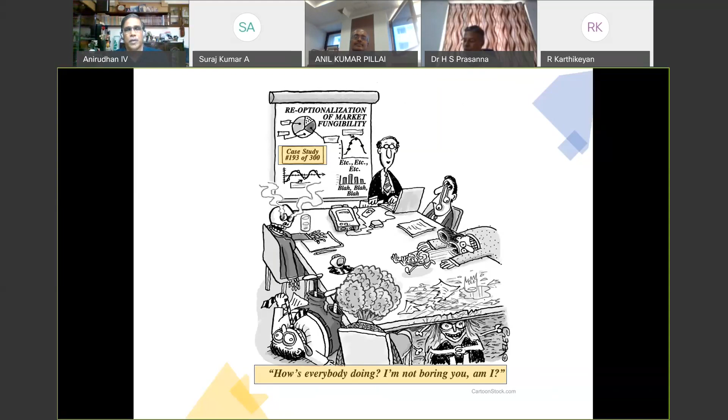So my attempt is to talk on the significance of case studies in geotechnical engineering practice. We all know that geotechnical engineering practice has come into existence because of a lot of case histories, a lot of failures, and after studying a lot of failures. So we have so many famous case histories all over the world, and some of the most celebrated case histories around the world are:

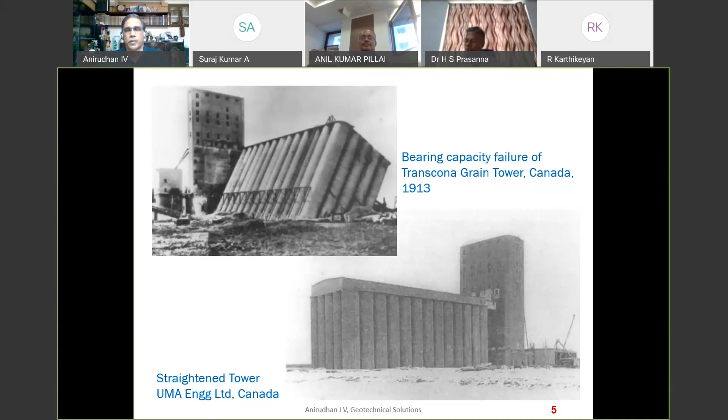there was a bearing capacity failure of the Transcona Grain Elevator, Canada in 1913, which was later straightened by the effort of several engineers and engineering minds. In Mexico, there are so many damages to different buildings, mainly because of groundwater lowering and construction of adjacent buildings, and also by the influence of heavy buildings on the adjacent light buildings. So the light buildings got damaged because of the interference from the heavy buildings. So there are a lot of cases like that in Mexico.

And all of you know the Pisa Tower, Italy case, which is a well-studied foundation issue, and there are numerous papers on the Pisa Tower foundation. And one of the celebrated case histories is a reticulated root pile technique that was used for earth retention construction of a tunnel in 1997. This is close to Manchester, where they used a series of micropiles interacting with each other to support a 14-meter high earth for the reconstruction of the tunnel.

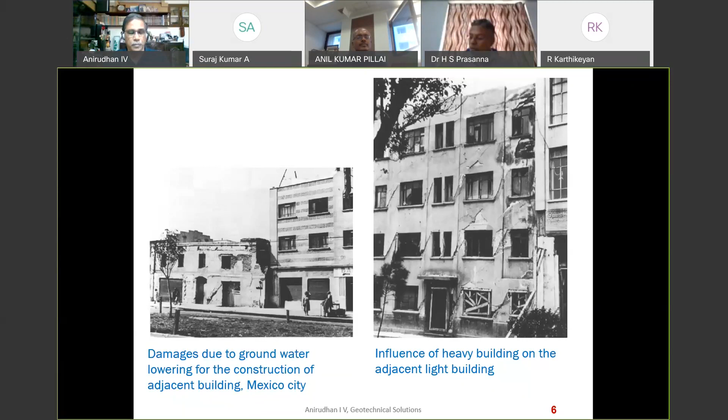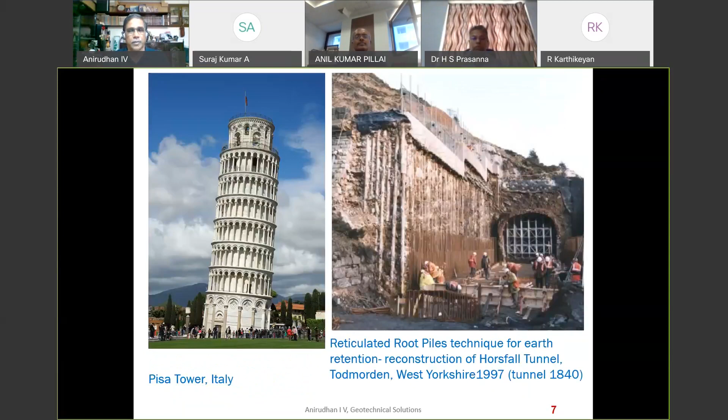And we have more recent cases like the Nicoll Highway collapse in 2007. Then we have Burj Khalifa Tower, which has no issues, but this is a good case of piled raft foundation where the actual settlements were much less than the expected settlements. We have the case of Millennium Tower in San Francisco, where there was an issue of building settlement. These are more recent ones, and many research papers are available on these structures.

When we come to the case histories from India, we are very much open to all the case histories, which is evident from conferences and workshops like this, as well as several sessions during the IGS Indian Geotechnical Conference every year. But there is a lack of well-documented case histories in India, because of which we do not know much of the research and advancements happening all over India. So my attempt is to present some of the case studies which I came across and see what contribution they make to engineering practice. All these case histories are reasonably well documented by me in some of the conference proceedings.

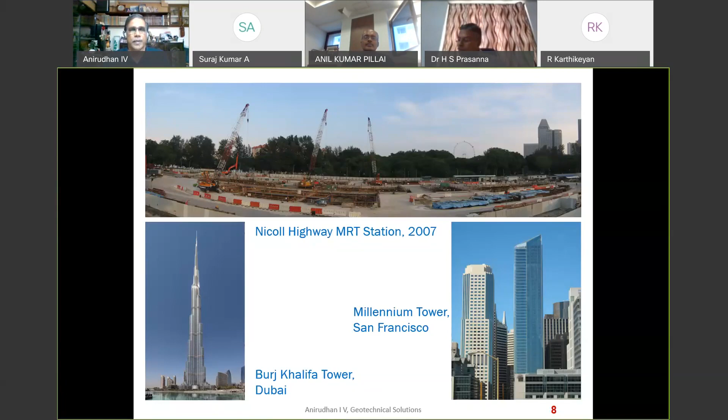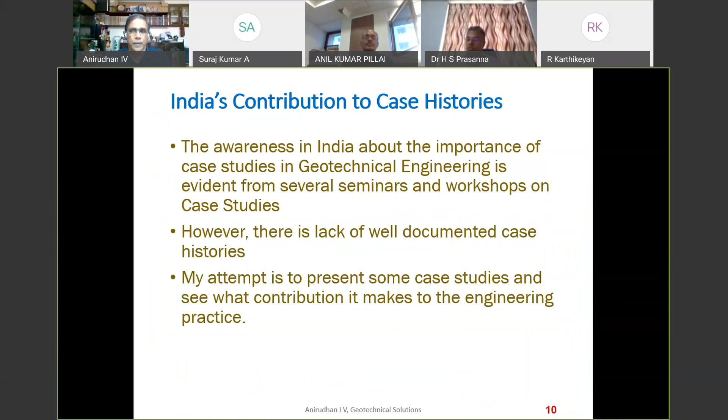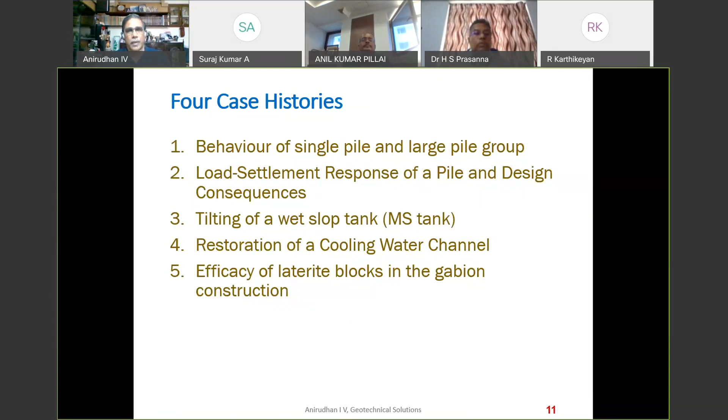I shall present 4 cases if time permits. One is the behavior of a single pile and behavior of a large pile group and how they relate, and the load settlement response of a pile and its design consequences. And there is a case of tilting of a tank in one of the refineries. And lastly, the restoration of a cooling water channel in NTPC Kaniha in Talcher. If time permits, I will briefly show some pictures of the efficacy of laterite blocks in gabion construction. So this will be the structure of my presentation. I will start with single pile and large pile group behavior, which will show why a detailed settlement analysis of a large pile group is necessary.

So I will take you to one of the largest fertilizer plants in Paradip, where we had several large storage tanks holding ammonia and acids, and some fuel oil tanks. Most of these tanks were supported on short piles, in large groups. The ammonia tanks were 33-meter diameter and phosphoric acid tanks 28-meter. And we had sulfuric acid tanks of 28-meter diameter and some fuel oil storage tanks with smaller diameter. These were constructed in the early 80s, and all these tanks are performing well now.

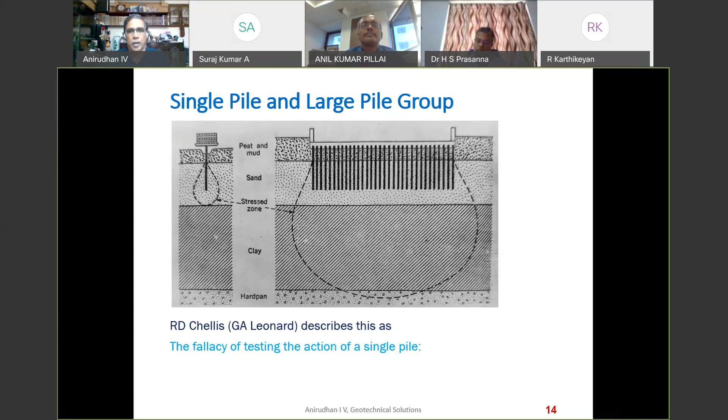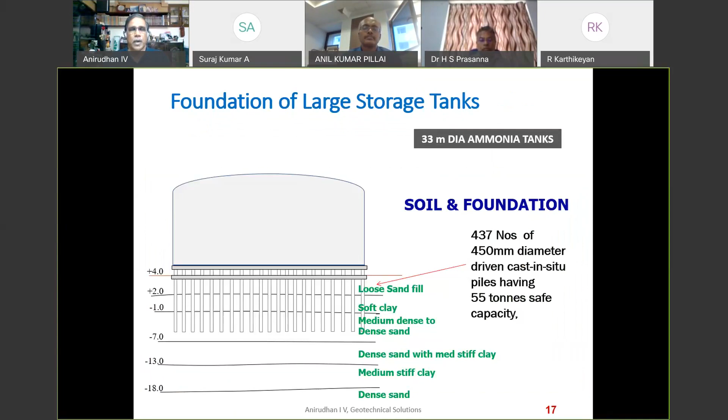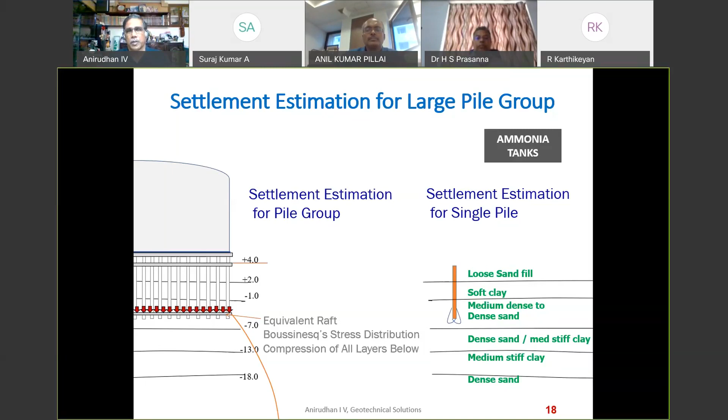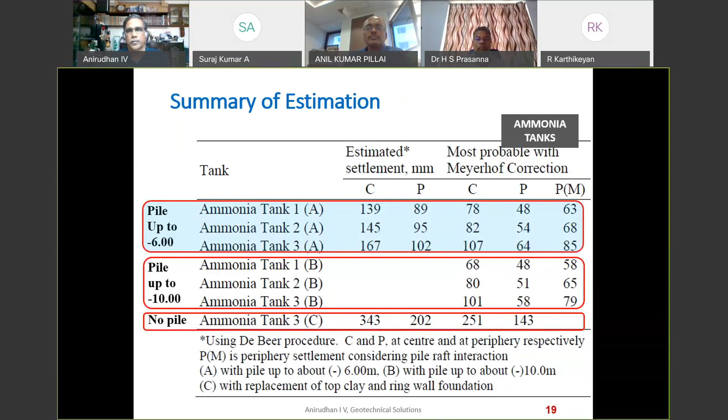So we modified the estimations using the Meyerhof corrections, and again applied the correction for interaction between the piles. So we expected a settlement of the order of 100 mm towards the center and roughly 70-75 mm towards the periphery. And there is also an estimation when the tank is not supported on the piles, only on natural soil. We expected a very large settlement of 300 to 350 millimeters in the center.

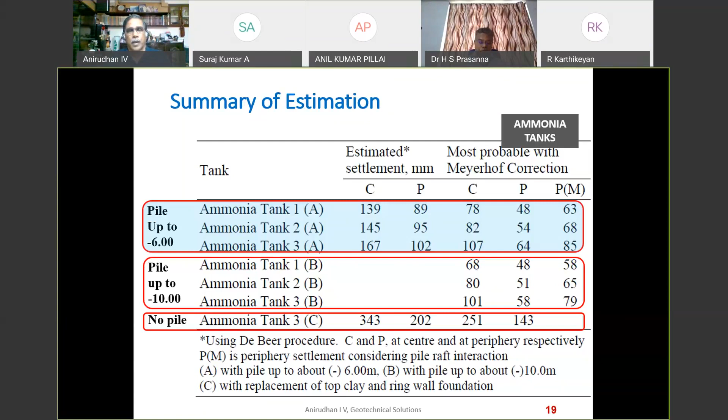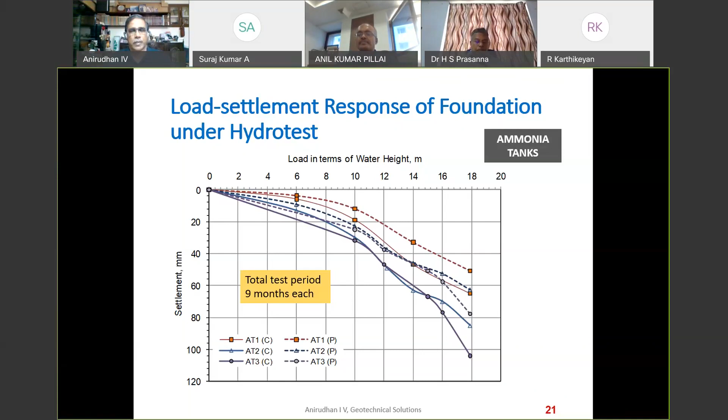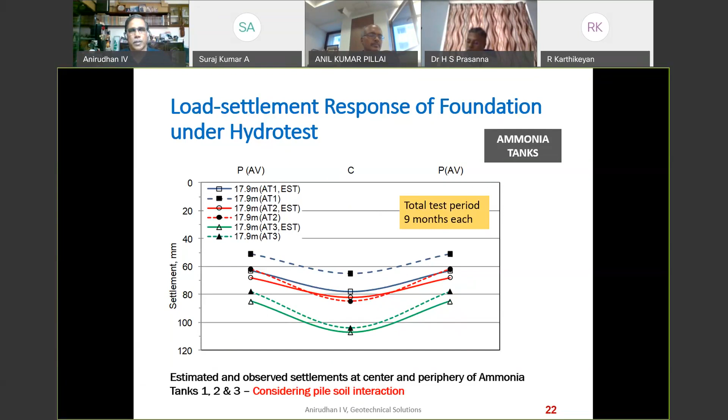This is another presentation of the settlement. Along the periphery, you can see almost uniform settlement under each load increment, which went up to around 63, 64 mm for the tank 2 foundation.

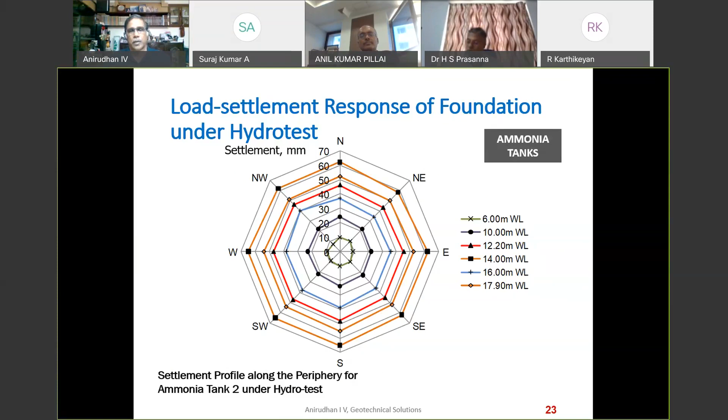And we can have a comparison with the performance of a foundation on natural ground, marginally treated with compacted soil on the top. This is for a fuel oil tank with a ring wall foundation. This tank foundation settled by about 160 millimeters in the center, and we had settlement of 121 to 140 on the periphery. Whereas under the same loading condition, these piled foundations, which are much larger in diameter, settled less than 42 millimeters. So this is for the comparison. I have taken the load of 10 meters of water in both cases, and there is a large difference between the settlements of these structures.

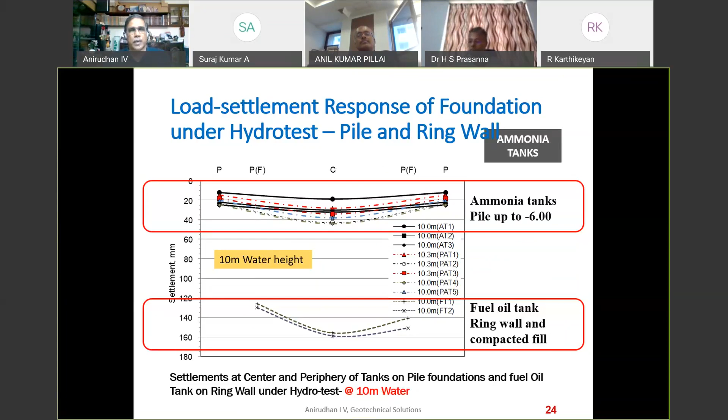So what we take from these case studies: we have a load settlement response on a single pile, which is influenced by the share of the skin friction and end bearing, and the soil conditions only around the base. Whereas in the case of large groups, the influence goes much deeper, and we need a detailed estimation to see whether the foundation is safe. And there are standard procedures available for estimating the settlement. It also shows that piles under a raft reduce the foundation settlement to a great extent. And the settlement is relatively uniform if the soil conditions are favorable, unless there is a very large difference in the soil conditions below the foundation.

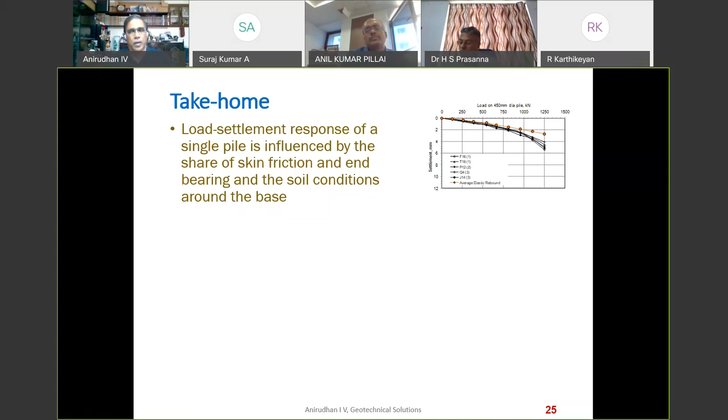So this was my first case study. Then I'll go a little further on the load settlement response of a single pile and its design consequences. Mostly we have foundations with 2 or 5 or 6 piles in a group, and there will be some settlement issues when it is a group, but it all relates to the single pile response under the load. I'll show how a load settlement response from a routine load test can mislead about the actual performance of the pile.

So these are some of the load settlement response curves from routine load test. Routine load test, when we refer to it, is we load the pile up to 1.5 times the safe capacity. Here the design capacity is 300 tons and the ultimate capacity is 600 tons. So these piles are loaded up to 450 tons, 1.5 times the design capacity.

And we have IS 2911 Part 4 recommendations in which the serviceability criteria is defined, such as when we load the pile up to 1.5 times, the settlement should not be more than 2% of the pile diameter. So these piles are 760 millimeters and 2% of the pile diameter is 15.2 millimeter. And the shaded area on the graph is the limit of settlement of these piles when it is loaded to 1.5 times the safe capacity.

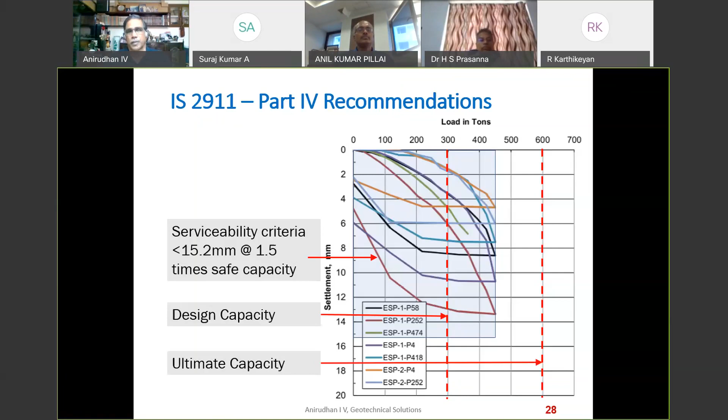Now, if we project one of the pile load response curves towards the failure, you can see the curve which is projected, and another curve from the other load test results, then the third one from one of the other load test results. So we can project roughly. So what we find here is when we project the load settlement response close to a failure condition, most of these piles except 2 may not have factor of safety 2 against failure, that is ultimate capacity.

That is, even though it satisfies the settlement criteria of serviceability under 1.5 times safe capacity, it may not be safe with respect to the ultimate state criteria, which is the factor of safety should be more than 2 when the pile settles more than 10% of the pile diameter.

We look at some results of the test piles, which have all gone to the failure condition. So these are also of 760 millimeter diameter bored cast-in-situ piles, and you can see most of the piles have gone to the failure condition. So if we look at the criteria in 2911 Part 4, see this 2% pile diameter, the settlement is 15.2 millimeter, and you can read the corresponding loads from these curves. And we will also have the failure criteria of 10% pile diameter, and compare the safe capacities derived from these procedures as stipulated in IS 2911 Part 4.

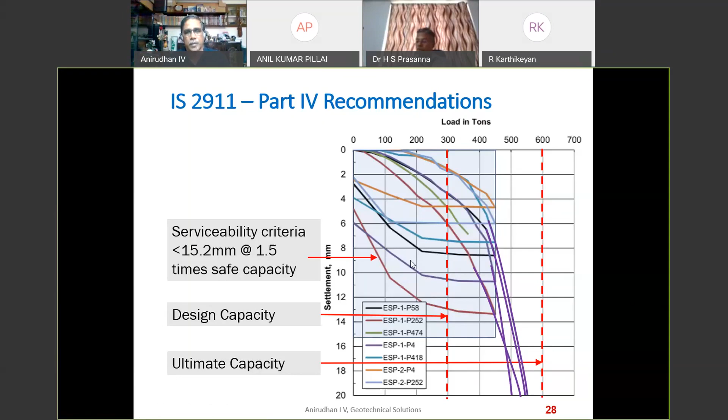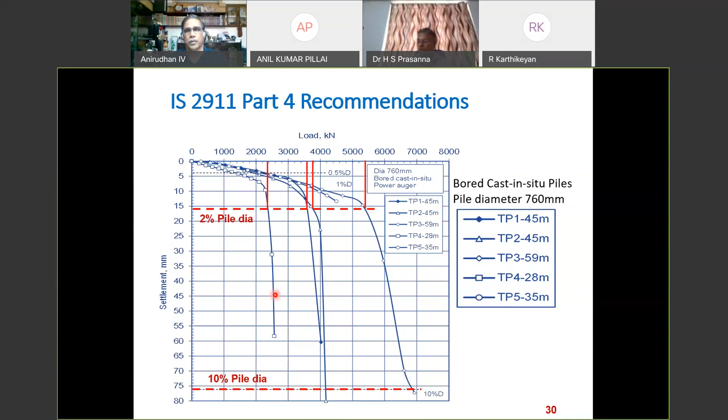Unfortunately, during the routine load test, we do not go to the failure condition. We have settlements close to 1.5 to 2% of the pile diameter, and we are not able to tell how these piles are going to behave when ultimate load reaches. So what we see here is routine vertical compression load test on piles may not exceed the limiting settlement of 2% of the diameter. But there is no confirmation on factor of safety 2 against ultimate capacity because we have no way of knowing.

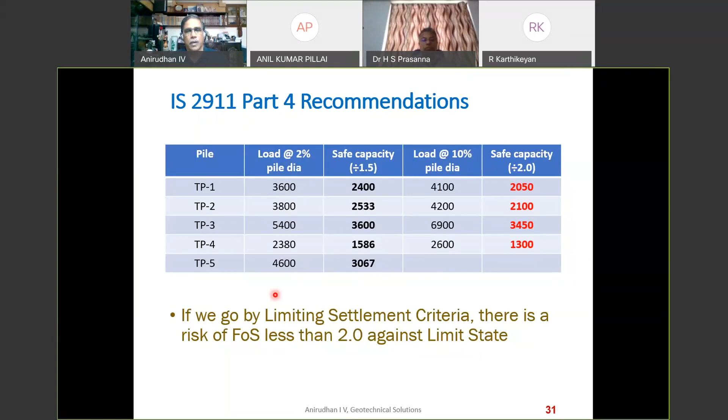The factor of safety can be less than 2 for a friction dominant pile, and a detailed analysis of load settlement response is necessary to confirm the safety factor. So this is very important when we want to really assess the actual performance of the pile during the life of the pile foundations. There are procedures from which we can estimate the ultimate capacities from a reasonably well-developed load settlement response curve for single piles.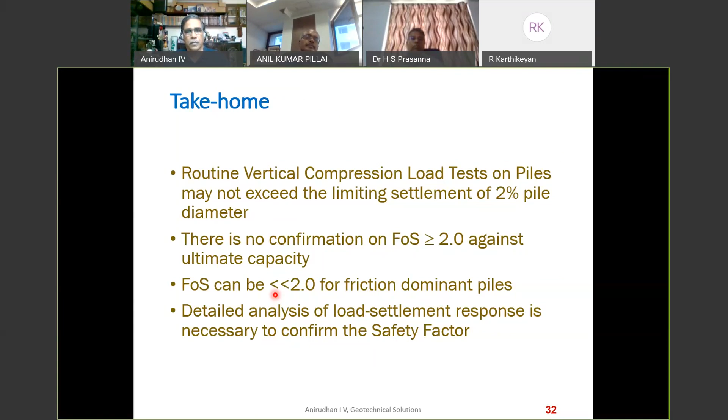Now I come to my third case, tilting of a wet slop tank. Storage tank holding wet slop oil in one of the refineries. Here, this is a case of a disconnect between the design and the field environment. The design was done for certain site conditions, and the actual field conditions were different. So these are the tanks of 10.8 meter diameter and 13.9 meter height for storing wet slop. And it's with a conical fixed roof.

And these tanks were resting on ring wall foundation at 3 meter depth, overcoming 2.5 meter thick fill of lateritic soils. So the ring wall will confine the soil inside the ring wall, which will try to transfer the load through hoop into the ring wall. Then the load is actually transferred to the depth of the ring wall foundations. So for the sake of supporting the wet slop tank against wind load, there will be anchors connected to the ring beam. So these tanks are resting on the ring beam directly, not on the earth inside. And we estimated a settlement of 50 to 70 millimeters under the full water load of 13.4 meter.

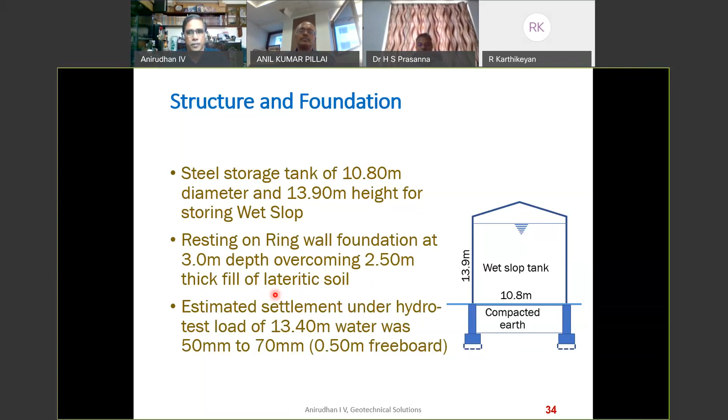That was the estimation, and there was a requirement of performing the hydrotest, especially for allowing all the settlement to happen before calibrating the structure. So we got settlements of the order of 20 millimeters on the northeast point, and on the opposite side we had 76 millimeters, and it was gradually increasing from the lowest point: some 20, then 30, 45, 61, 76. On the other side, we have 40, 59, and 75. So there was a tilt of the tank. This was when the tank was loaded with only 50% of the total water load, that is 7 meters of water.

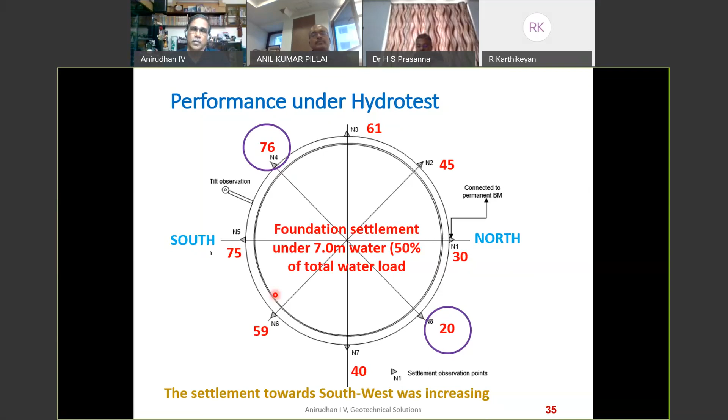And there was an alarm bell put by the owners of the tank. The settlement towards the southwest was increasing under the load of 7 meters, and there was a danger of possible failure, and the tank was asked to stop the loading with further water load, and the tank was immediately unloaded.

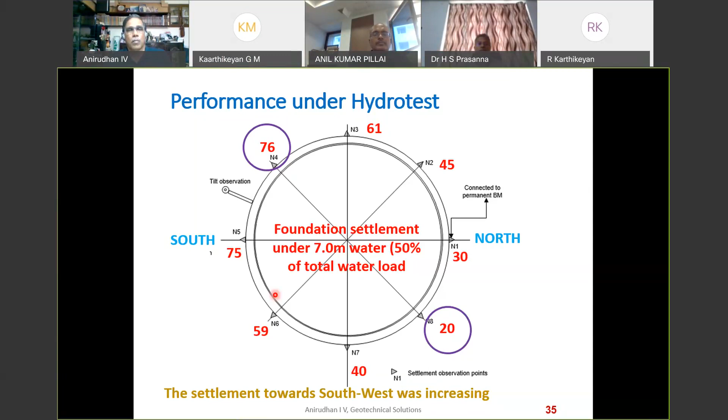Okay. So, shall I continue? Sir, there's some disturbance, I believe, from somewhere. Sir. Let me just find out. How long? I don't know. Find out, sir. So I will continue. I think I will not lose time.

In reality, the actual site condition was different. The site development was not completed when the tank was hydro-tested. You can see a very steep slope of 1 in 6, very close to the tank. That is only about 2 meters, less than 2 meters away from the steep slope. So it was suspected that there is a foundation failure, or the soil was trying to move towards the excavation site, and the tank tilted towards that.

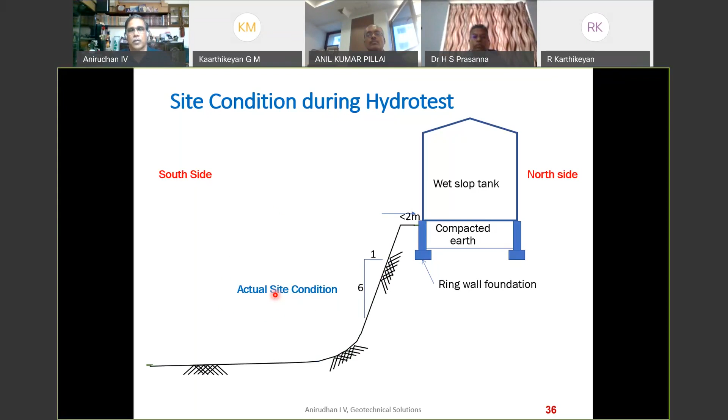We would have had the failure shown in the bottom of the picture if the loading was continued. Fortunately, this failure was prevented by unloading the tank. And we had to take care of how we go about further hydro testing. So the site development was taken up, and the reinforced earth wall was constructed to form the dike wall area. This reinforced earth construction was used in that.

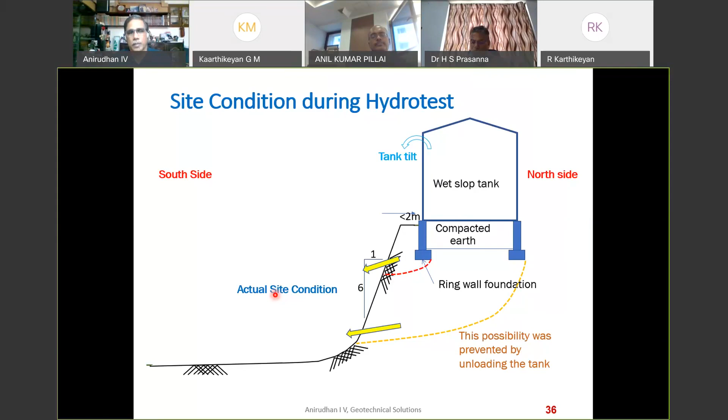We also put some steel pipe piles around the tank foundation, where we suspected some movement of the foundation. These piles were supposed to hold any further movement of the soil. And all these piles were connected with the pile cap ring beam, so that possible movement towards the initial failure does not happen again when we hydro test it again.

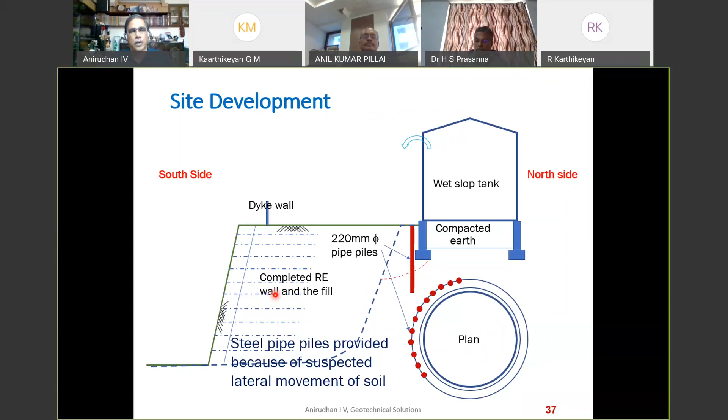We continued with the hydro test of the tank, and we got settlements of the order of 20 to 40 millimeters further from the already happened settlement. If you look at the tabulated form, we had a settlement of 25 to 75 millimeters during the initial loading, after which we discontinued and did the site development. Then we had 19 to 43 millimeter settlement when we hydro tested further to the maximum full height. You can see the cumulative settlement after the full height hydro test was 45 millimeters on one side, and on the other side we have roughly 120 millimeters settlement.

The settlement of the tank was stabilized over a period of 2 months, and we found that there will not be any further settlement of the tank. But the final tilt remained the same, roughly 74 millimeters over a span of 10.8 meters.

So we always have a concern with tilted oil tanks, the primary concern being the structural stability and the deformation of the shell and base. And there is also a concern on the calibration of the tank and sustainability of the calibration. We may have to do more frequent volume calibration, to see that the tank is giving the actual volume it is expected to hold.

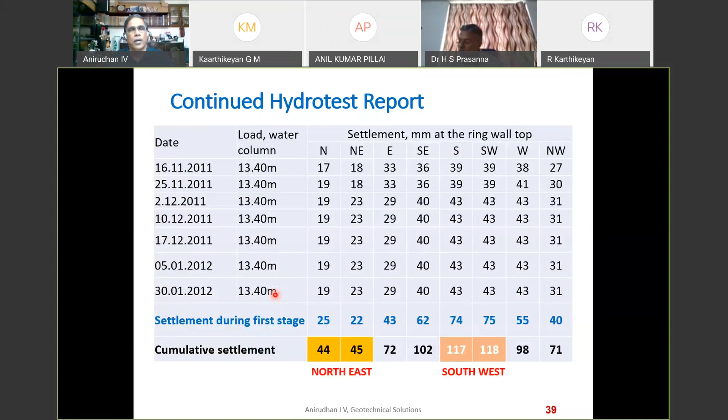And the tilt is visible. There is an aesthetic concern, where one can decide whether we have to live with that or we have to change it. So regarding the structural stability, we should study further how stable the structure is, the base of the tank and the shell of the tank. So it depends on the tilt of the tank, whether it is a planar tilt.

When we call planar tilt, the base of the tank is tilting along the tilt. There is no deviation from the tilt line. Whereas if we have the base moving away from the planar tilt line, we call it non-planar tilt, which can damage the tank structurally. If you have a non-planar tilt, it can induce a lot of stress in the base as well as in the shell.

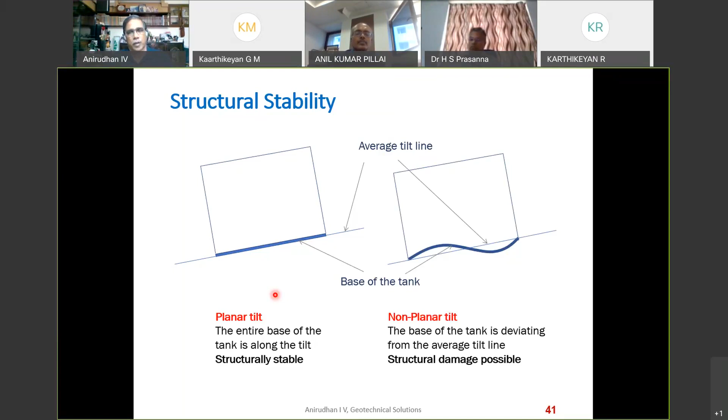There are several ways of estimating the planar tilt, one of the famous being Allen Marr's procedure. So the orange line is the analytical computation of the planar profile, whereas the blue line is the actual profile of the base slab or the shell bottom. So here we find the analytical planar profile and the actual profile are very close, and generally we can say the tank had a planar tilt without much deviation from the planar tilt profile.

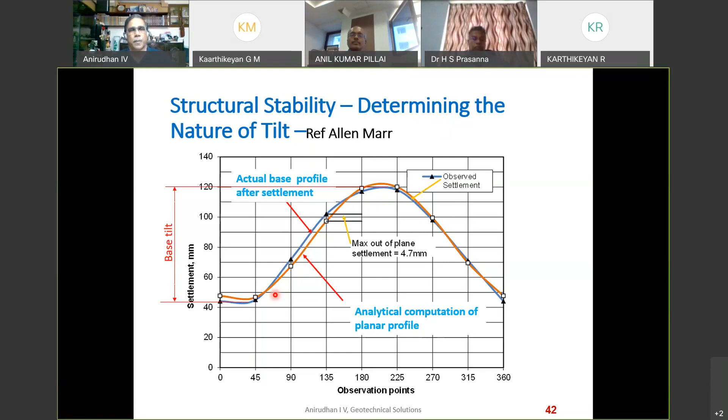We have roughly 4.7 millimeter out of plane settlement, and there is a base tilt of roughly 75 millimeter from northeast to southwest portion of the tank. So as summary, the maximum differential settlement was 78 millimeters, which is projected over the height as 102 millimeter.

This tilt is acceptable for a tank with conical fixed roof system, and freeboard was 550 millimeters. However, the freeboard was reduced to 430 millimeter because of the tilt, and the owners agreed to that reduction. And the maximum out of plane settlement of the tank was 4.7 millimeter, which was not of any consequence as per the provisions in API code 653.

So we could not see any structural damage to the shell and the bottom slab after this tilt. So the tank got commissioned and is being used satisfactorily, I hope. This happened more than 15 years ago.

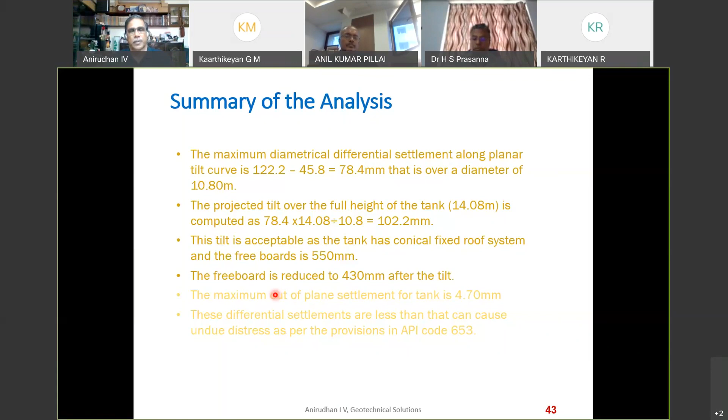What we have learned from this case study is that the design environment shall match the actual site conditions. The stability of structures near steep slopes is always at risk. And especially for tank foundations, we need a detailed analysis of the hydrotest data to confirm the structural stability, and see that the differential settlement along the periphery of the tank is not large enough to cause any structural instability.

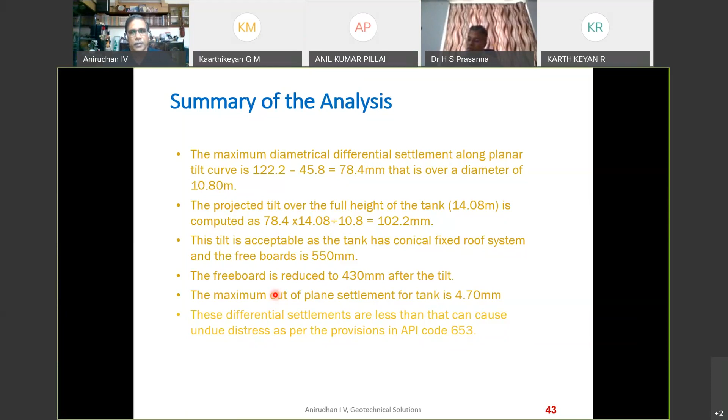But to have these things, we need close monitoring of all the structures, and we do not have a good practice of monitoring structures in India, but that is the most required thing in any critical structure. When we construct, we are assuming so many parameters, but we need close monitoring of the structure. How does it perform when it is being loaded?

You can also see that stage loading of storage tanks ensures stability. In this particular case, we realized the tank was settling more when the load reached 50%. Had we continued loading without measuring the settlements, it would have failed when the load reached close to the maximum. So stage loading and continuous monitoring helped us detect a problem with the foundations. That is the most important part: we should monitor any critical structure, especially when the tank is holding a harmful or hazardous product.

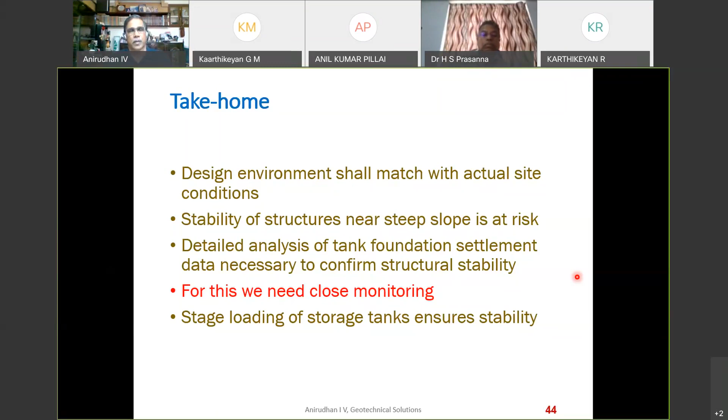I will come to one of my favorite projects, the restoration of a cooling water channel, which is not very geotechnical in nature. Mostly it is a mechanical solution, but with a little geotechnical component. I came to this problem only because I am a geotechnical engineer, and everybody thought it was a geotechnical issue, but it was not.

It was maybe the largest thermal power plant in India, NTPC Kaniha in Talcher in Odisha state. It has roughly a 1.5 kilometer cooling water system. This cooling water system was built in the late 70s or early 80s, and it was functioning well until 2016.

There was a damaged portion, about 55 meters length of the cooling water channel bank, damaged during November 2016 because they constructed a cable tray system on the banks. The actual failure started in January 2016 and it magnified by November 2016.

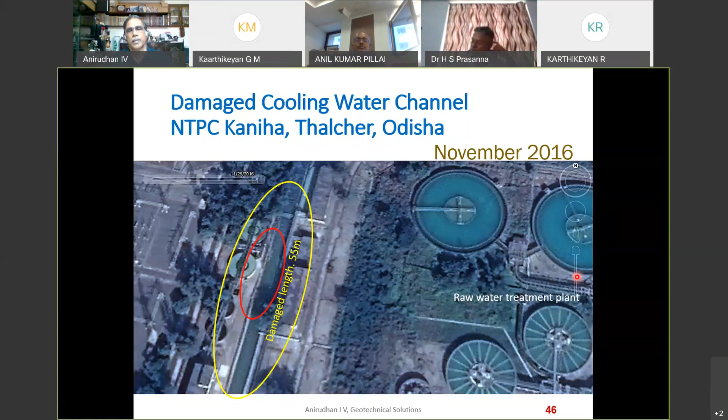Fortunately, as a consolation, only the banks were damaged, but the bed was not damaged. Some divers tried to go inside and see, and we assumed that the bed was not damaged, which was later confirmed by lowering long boom cranes and checking the bottom of the channel.

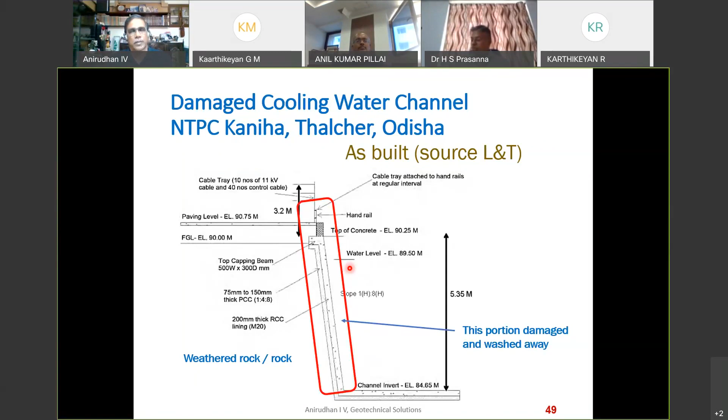The constraints are that the channel runs full always, and there is no shutdown to stop the cooling water channel. The velocity of flow is 2 to 3 meters per second, because of which no diver can safely work in the flow. And NTPC put a work schedule of 2 to 3 months to complete the restoration. So these were the constraints for making any restoration work.

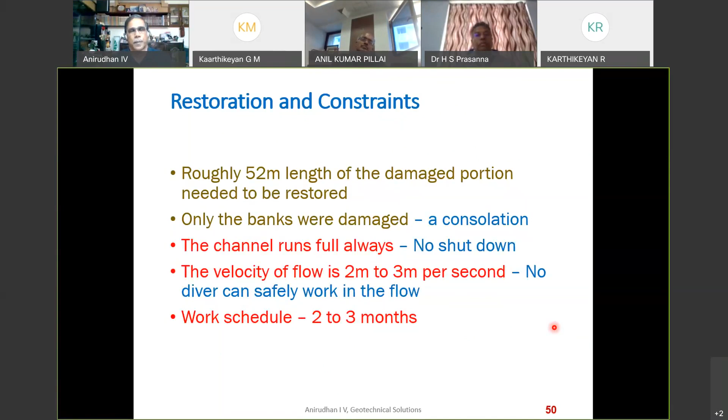The thought process of restoring it started in 2016, and it was never done until November 2017. So this was a scheme proposed by the contractor when they were approached by NTPC.

They proposed both micropiles inside the drain, and precast panels were to be lowered through the micropile, requiring divers to execute this work. All the panels would be connected to the micropile, and the space between the bank and the precast members would be concreted to make it a stable structure.

So this was the scheme proposed by the contractor, and unfortunately this could not be executed because of site constraints. Nobody could go inside the flowing water, and the thought process continued till 2017.

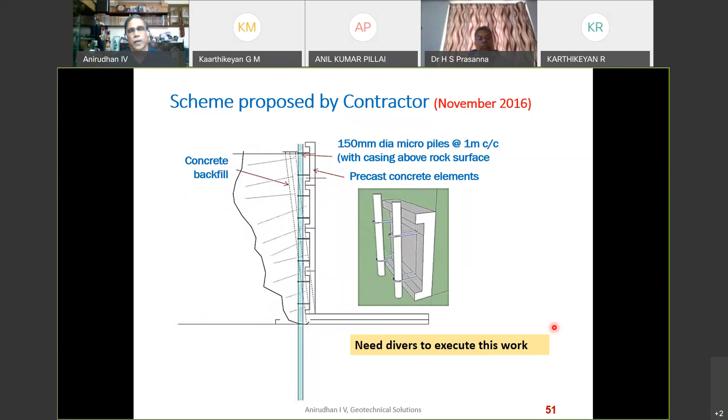So I was able to give a system in 2017 when they approached me, in which there was no job done from the waterfront. This is the existing bed which is stable, and the sides which are damaged you can see from the picture. What we proposed was we'll have the ground prepared for the restoration work.

We'll install micropiles on the banks instead of installing them inside the tank. Initially, the micropiles were supposed to be installed here. Now, in the new scheme, the micropiles will be installed from the bank only, at enough distance from the existing periphery of the channel. There was enough working space to install these piles.

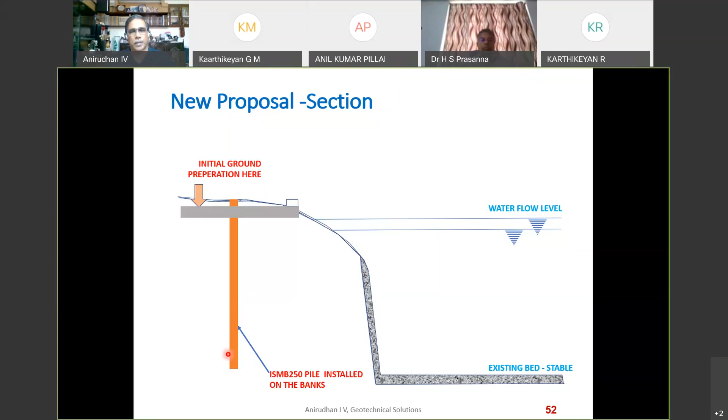Then we'll connect these rows of piles with a primary beam, and we propose another secondary beam close to the channel section, at almost mid-width of the distance between the micropile and the channel space. These primary and secondary beams are connected with cross beams.

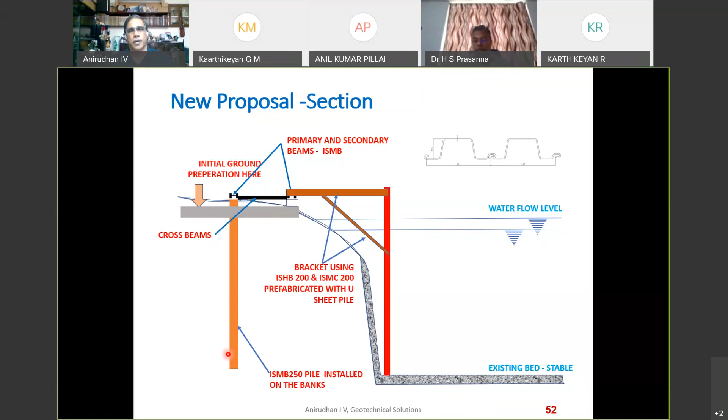Then a bracket system using a sheet pile in the waterfront and H section and ISMC section as a bracket, which will take the necessary moment actions when we fill the concrete. After placing this bracket system, we will fill the bottom with plastic concrete, which eventually will stop the flow into the annular portion. Then we will complete the concreting in the space left between the ground and the bracket system. The final work will be the platform construction and handrail construction.

You can see the sheet piles which are proposed for this bracket system. This is a more detailed section of the scheme, and this is a plan of the scheme. What we see are these two brackets, which have ISHB sections and ISMC sections, and one section of the sheet pile.

Once we place two brackets, we will place the remaining two sheet piles to close the gap, so we get a continuous wall of sheet pile. This was the scheme proposed, and it was executed.

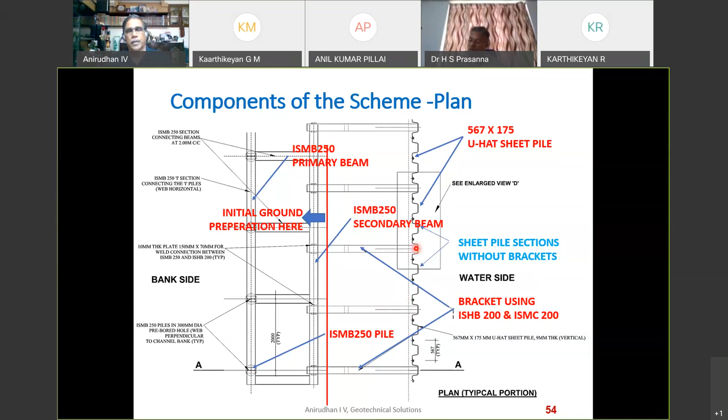We had construction of the micropile, filled with grout, a polymer grout mix using tremie. Then the placement of the primary and secondary beams, followed by placing the safety platform over them.

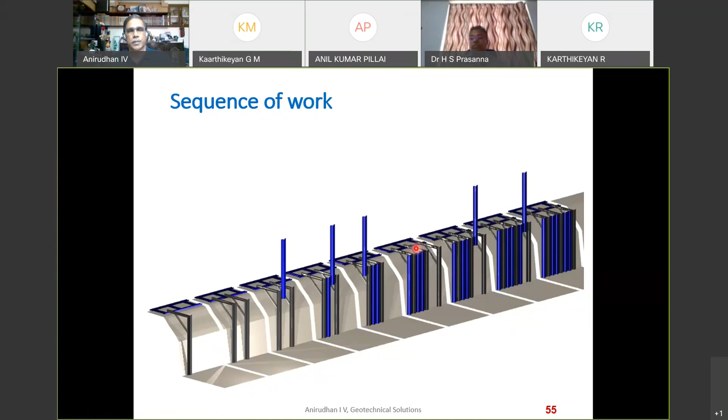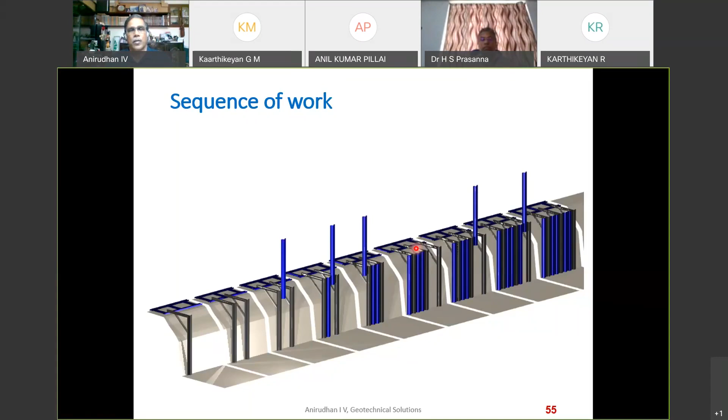This was lowered and connected to one of the U-hat sheet piles, which is lowered through the existing sheet pile groove.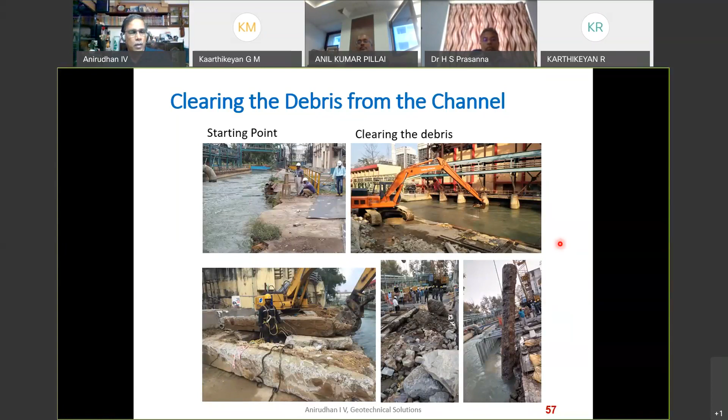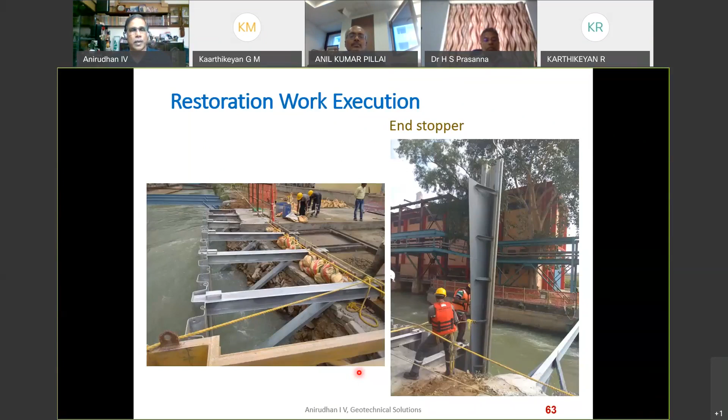I'll run one video where you can see the speed of the water in the channel, whereas in the enclosed portion there is no movement of water. We were able to stop the movement of water inside the channel.

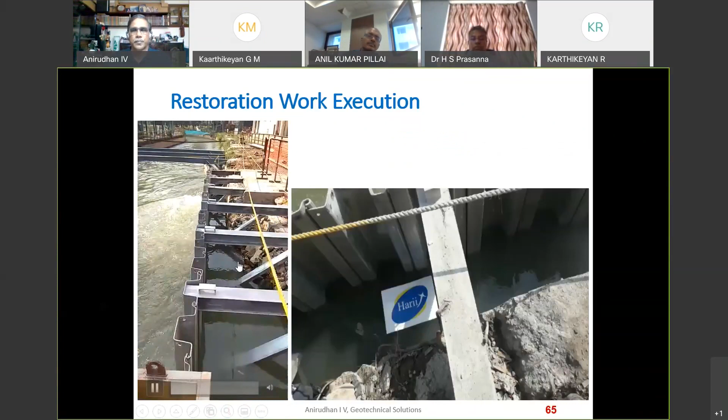There is another video showing the flow of water outside the wall and practically no flow in the enclosed portion. This was achieved by putting in this end stopper, and no water flow entered the enclosed area.

Then the plastic concreting was done through the tremie, followed by the first pour of the concrete using the tremie, and then the second pour. We had nominal steel provided in the concrete so it has a monolithic action with the existing sheet pile. These are the different stages of concreting.

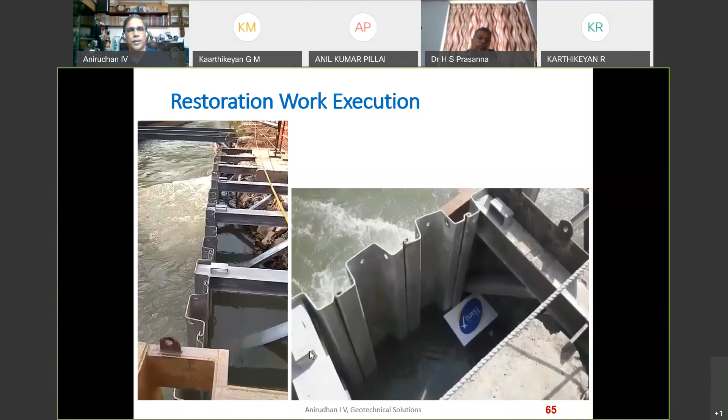The wall construction is in progress; almost 60 to 70% of the wall was constructed, and the capping of the wall was taken up later.

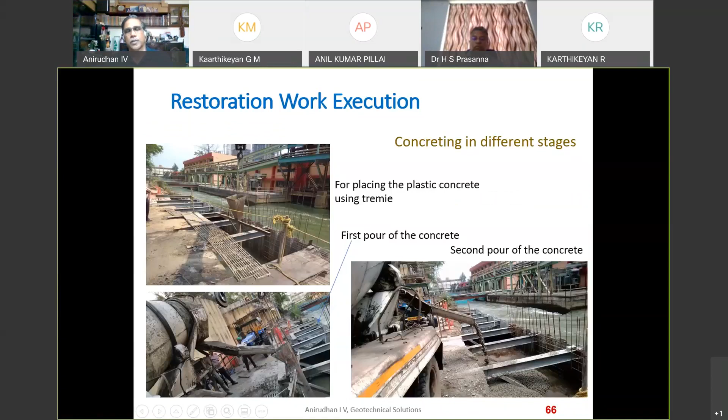You can see that the mixer was able to come very close to the wall being constructed. What we have to notice here is that the sheet pile becomes almost redundant once the concrete is set, but it will protect the concrete from further erosion later.

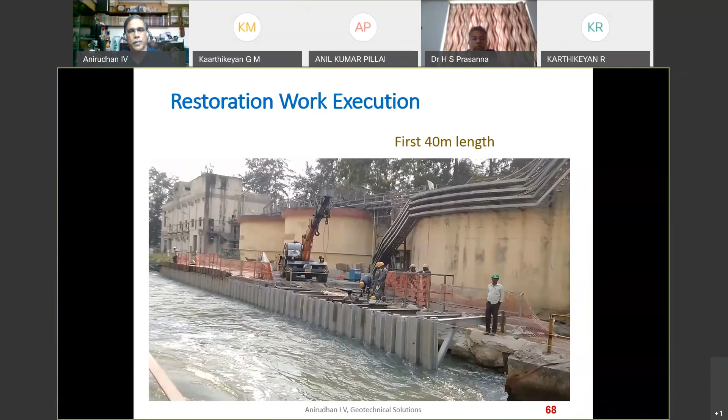This is the full length constructed, roughly 52 meters. The platform provided a much better base for placing other structures or further work in this construction.

So what we get from this case study is that rectification works are often complicated and expensive, but we can find simple solutions if we search for them. Unfortunately, geotechnical engineers tend to look at all problems as geotechnical issues; we don't like to think laterally, but we have to in certain cases. We also find that simple solutions are always overlooked when we demonize the problem, and there is always a suspicious view when we provide such simple solutions, which I faced for this case also.

I'll come to my last case study. I think I'll take another 5 minutes.

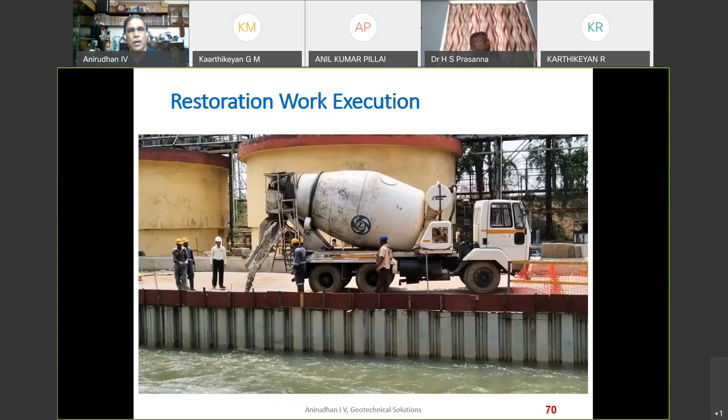I just wanted to talk about laterite blocks, which are supposed to be a very good construction material in South India, in Kerala, Karnataka, and some parts of Tamil Nadu, as well as Odisha and Andhra Pradesh.

We used a gabion wall for retention of 4 to 5 meter soil fill in a water treatment plant in Kerala. We proposed to use granite as the infill for the gabion wall.

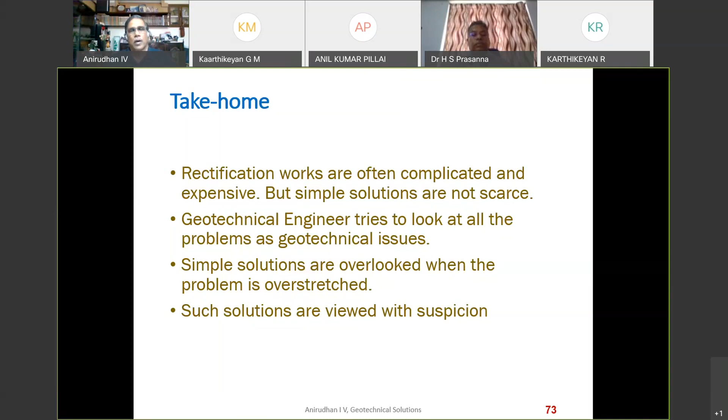During construction, there was a restriction on use of granite stones because of mining restrictions, and the contractor proposed to use locally available lateritic stone, which was considered by the consultants.

The proposal was to use laterite stones, not cut block laterites. But finally, the laterite stones were not available, and it was agreed to use laterite blocks, machine-cut laterite blocks, instead of the stones.

These are pictures of the gabion wall construction retaining about 4 to 5 meters of earth, which was eventually constructed. Some of the pictures you can see.

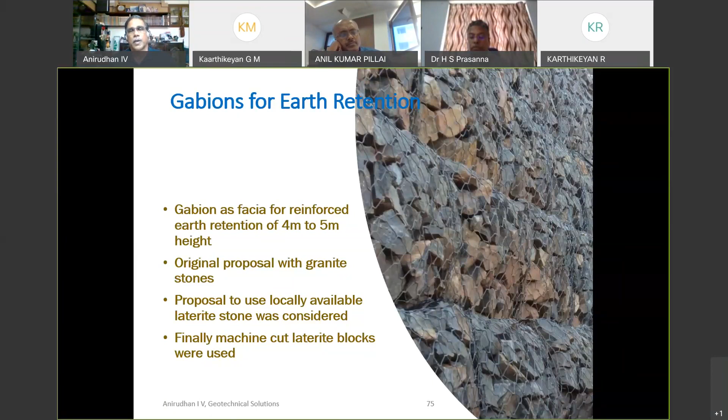This length was roughly 170 meters. You can see a lot of damage in the gabion wall constructed using these laterite blocks. The blocks were opened up. Some blocks were crushed out of the gabion net. There are more damages on the laterite blocks.

When we analyzed, we found that they used fresh cut laterite blocks for the construction of these gabions. Laterite is very soft when it's freshly cut, and it requires a maturation process, a wetting and drying process, which usually we do in most of the places where they use laterite blocks. When we allow it to maturate for 1 or 2 seasons, it becomes very hard. The soft particles become hard, and the block resists all the weathering actions.

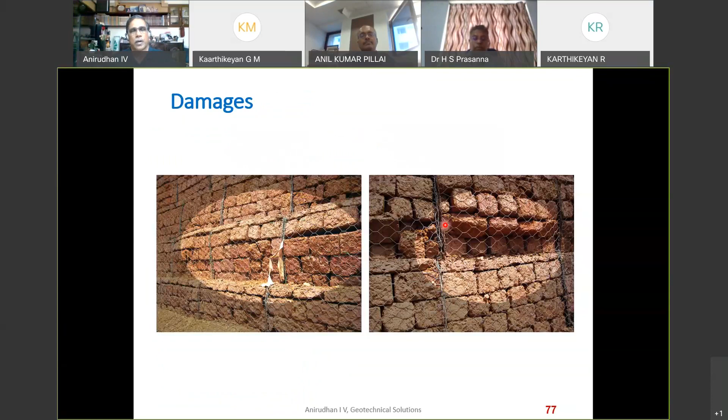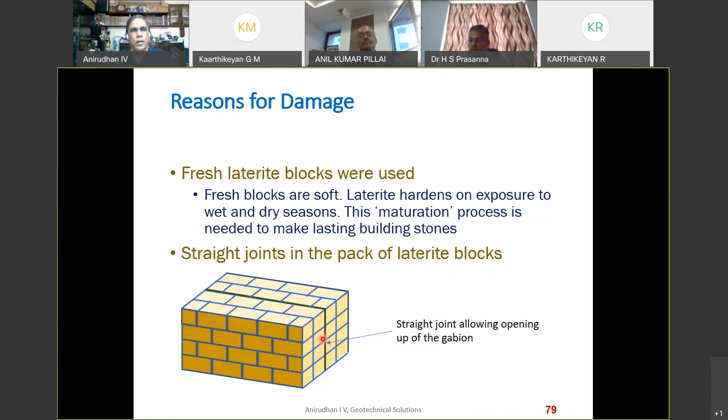So when we use locally available building materials, we can economize the construction, but we need to select the proper material depending upon the mechanics of the system, and strength and durability conditions shall be satisfied. In this particular case, we could not satisfy the third criteria, the strength and durability condition of the block, and also the second issue of such material needing to be selected depending on the mechanics of the system. The mechanism of a gabion wall is that there should be proper interlocking of the infill material, which was not available in the case of laterite blocks.

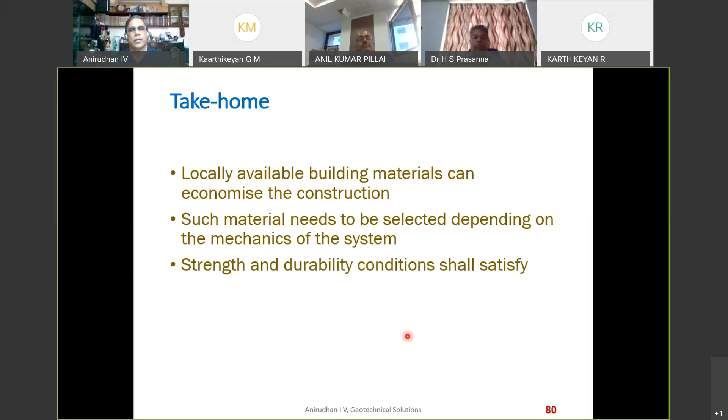So as the concluding remarks, geotechnical engineering practice is complex, and when we have a lot of case studies, well-documented case studies, it can bring the theories close to the practice and vice versa. And we need more and more well-documented case studies that will improve the quality of geotechnical engineering practice. These are some of my concluding remarks.

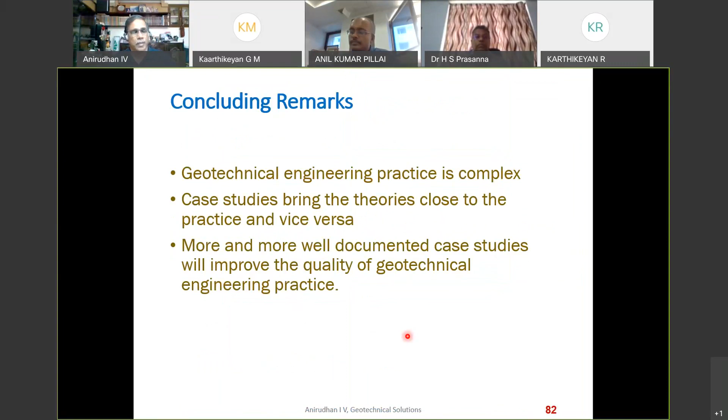And today morning I received this cartoon from my daughter. In the lockdown period, we think about eat and sleep. And I thank the organizers of this webinar for telling us there is more to life than eating and sleeping.

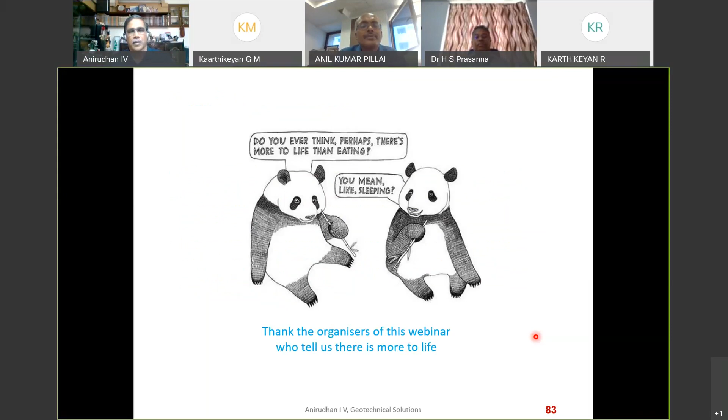In fact, to understand the concepts with much clarity, because that is one practical perspective that can be brought in. Case studies always have the problems outlined in a very clear manner, the suggested solutions, and the solutions which have worked as well. So I think the construction professionals would have gotten, from a practical perspective, the entire history of what has happened and what are the solutions.